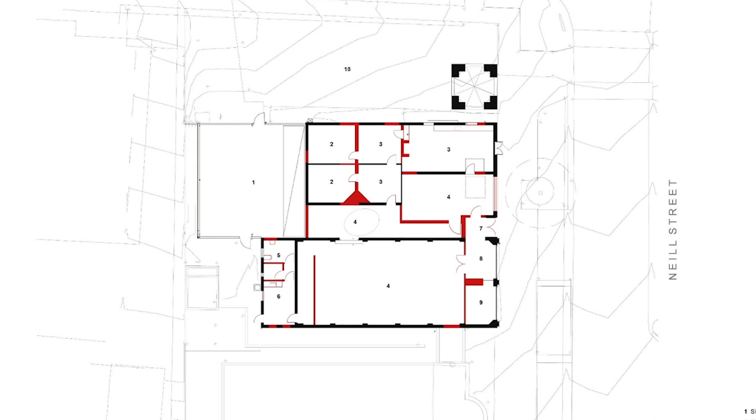We were thinking on an artistic level a bit like how Rauschenberg, about 60 years ago, got a de Kooning drawing and rubbed it out to create an artwork. We wanted to erase something and design through a new system like that, creating spatial channels, or space objects, that would talk to the garden and reveal the building in slightly new ways.

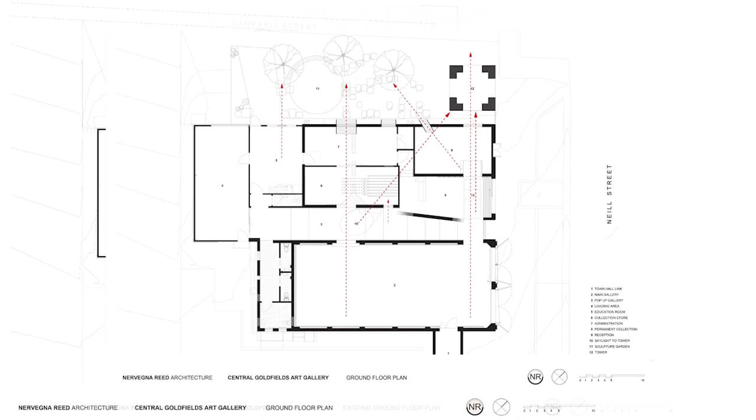It's a bit hard without a pointer, but you can see we've created a number of windows that cut through the gallery. They cut right through the gallery, under the tower, through the collection store, into the main gallery, into the garden. We've also cut two skylights, one into the entry and one into the middle of the ramp gallery.

We did a whole series of diagrams for the Venice Biennale last year, which diagrammed out these tactics. So this was one of them.

So you can see here, this is the front entry, and you're entering on the left, on the right here, through that door which used to be a window. Then we created a sort of pop-up gallery here in the ramp space, which is for younger artists.

Here we've cut through this spatial channel right through to under the tower. We took the shape of the underside of the tower and cut it right through the building, and that happens in a number of sequences.

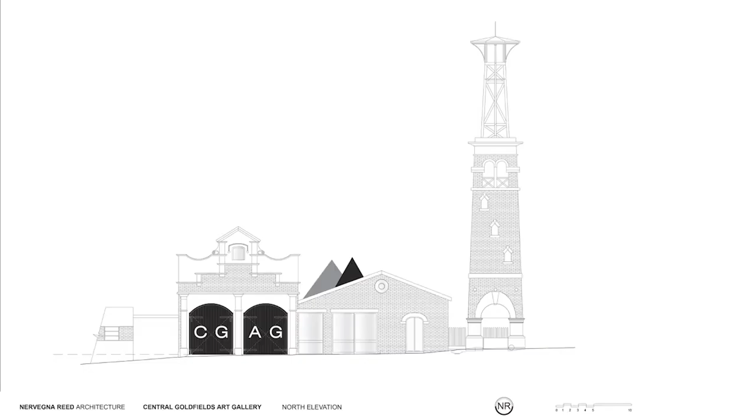We've got this triangular skylight, which you'll see in a second, and the other circular skylight over there. They both cut through to the tower, which you can see on the elevation, and on the roof there.

You can see how we calculated these things so that you bring the tower inside, which, although it's focusing on a Victorian bit of architecture, sees it in a different way, not the way the Victorians would have intended, so it becomes like a new experience.

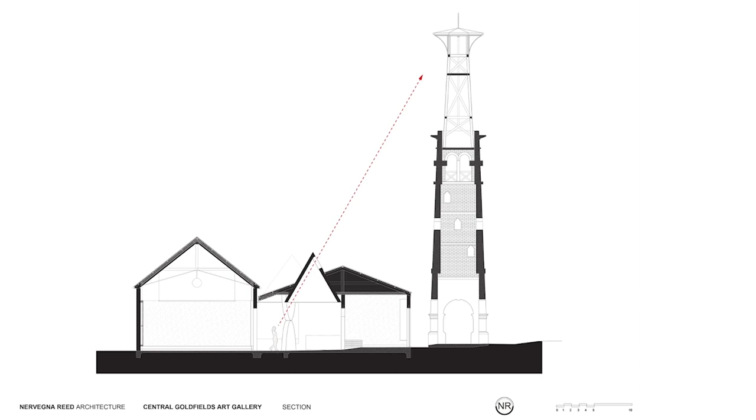That's the view there through that triangular skylight, so you're seeing through the tower and then the actual top of the tower.

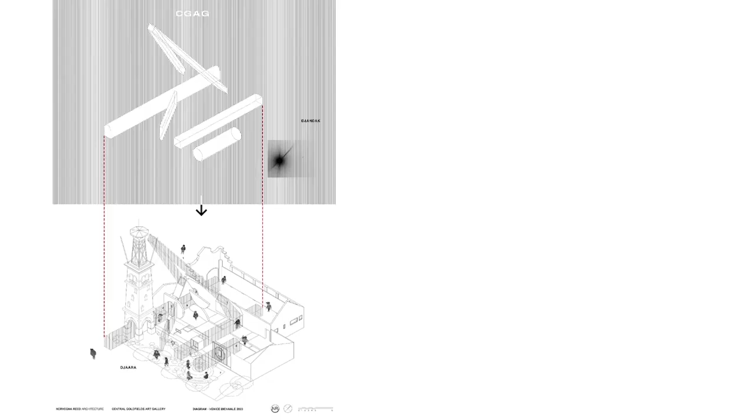You can see that there. There's more diagrams of those spatial channels, and that's up in the middle of the ramp gallery, so the skylight here.

So we kept these traces, including the footprints of the original people making the slab.

The other thing we did is we opened the doors to the street, which before had walls blocking them. And we put the gallery name in reflective tape on the front, so very simple gestures in a way.

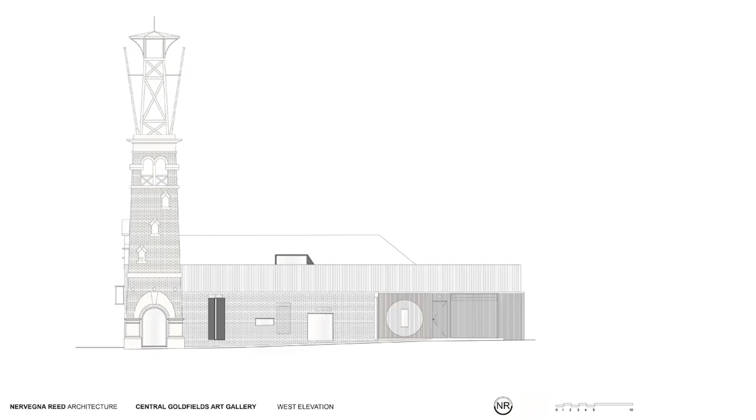We created this moon wall in the education room, which directly talks to the garden, the sculpture garden, which is being built at the moment. It's not finished, just halfway through construction. At dusk, Djandak have designed the space so that the moon wall will float in the space, and that's it from the inside.

So all these cuts through the building will aim at certain parts of the sculpture garden when it's finished.